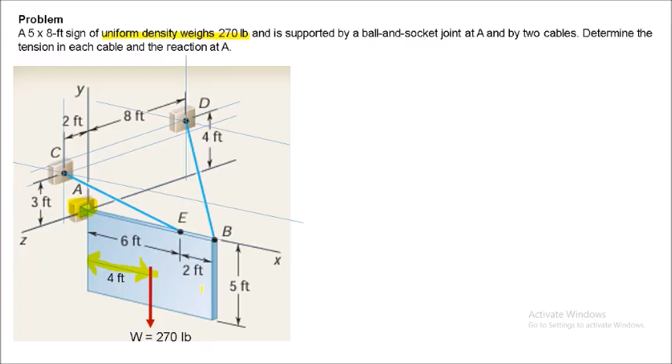Now, ang pinapahanap is yung tension in each cable. So merong dalawang cable dito. We have BD and we have CE. And aside from that, yung reaction at point A. So dito mag-a-act yung ating tension at BD. Dito naman mag-act yung tension at CE.

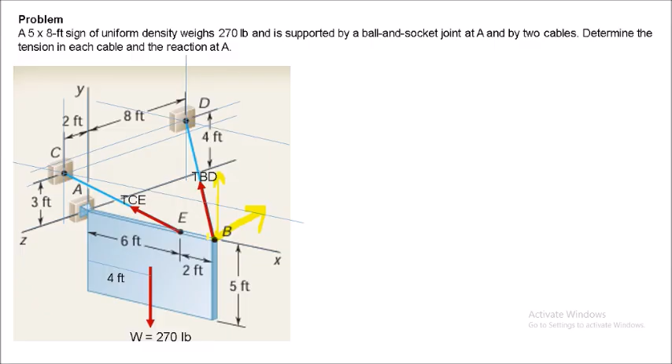Ngayon, para sa akin, medyo mahirap siya i-analyze pag dito yung point of view natin. Kasi kailangan natin i-resolve into components itong ating forces. Meron yang vertical, meron with respect to Z, meron with respect to X. By the way, nakalagay na dito yung ating coordinate axis. Ganon din dito sa TCE, mag-overlap yung ating mga forces. Baka magulo masyado pag mag-overlap.

So ang gawin natin is, by principle of transmissibility of forces, pwede natin ilipat yung CE and BD kahit saan, so long as it is in the line of action of the force. So instead na dyan ako mag-analyze ng tension, dito ko ilagay yung BD, dito na mismo sa point D. Pareha sila ng plane with point C. Tapos ito naman yung TCE. So take note, point C and point D lie on the same plane, the YZ plane. Okay?

So dito na tayo mag-components kasi hindi na tayo masyadong mahirapan kaysa dito sa point E and point B. So kunin natin yung components ng tension at BD. Merong papunta doon, that is the component along the z-axis. Merong upward, that is the component along the y-axis. So kung napansin niyo, dito yung upward or vertical component is y-axis, hindi kagaya nung previous problem.

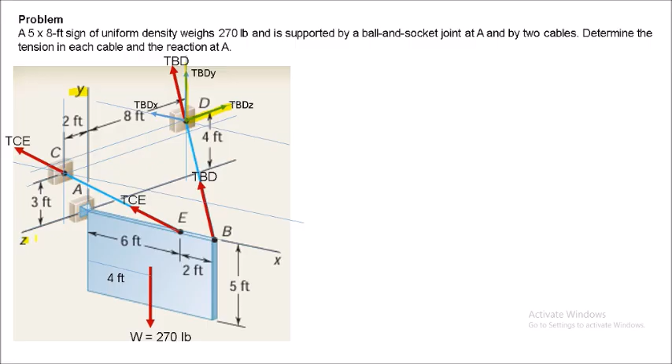So ito naman is the z-axis and ito yung x-axis. Dito papunta yung TBDX. So you must take note na madalas ganito yung mangyari. You need to know the orientation of the axis. It is assumed na dito is positive y, papunta dito is positive z, and papunta dito is positive x. Okay?

So kunin din natin yung components dito at TCE. Kung mapansin niyo, we have upward and then we have papunta dyan. TCEX, TCEY, that is upward, and TCEZ, pa-forward naman. So I hope klaro yung ating components kasi pag dito tayo sa point E and point B nag-components, magulo yung drawing. Okay?

So aside from that, magkaroon din tayo ng reaction dito at point A. Tatlong reaction yan. We have the reaction about the x-axis, RAX. We have the reaction RAZ. And then we have also another reaction, RAY, assumed to be upward. Okay, so now we have known the forces, the free body diagram. Hopefully ganyan din yung magiging analysis ninyo.

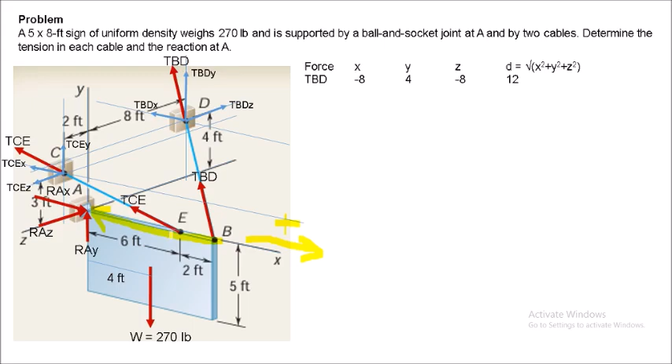So take note, yung kanyang magiging x component, that is from this point to that point. Pero yung kanyang direction is papunta doon. Our assumed positive direction is papunta dito. Okay? So pag papunta doon yung ating x component, nag-travel siya ng negative 8.